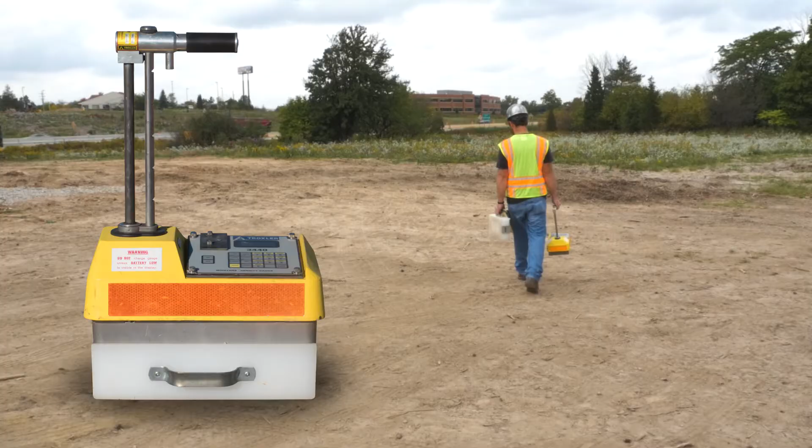The program you're about to see is for the density in-place testing using a nuclear gauge. MDOT currently has around 80 nuclear gauges, most of which are the Troxler model 3440. We won't cover radiation safety in this video, but we still need to be aware of the radioactive material that

we are dealing with. The first question: what does ALARA stand for? The answer: as low as reasonably achievable. Next question: what are the 3 ways we can practice ALARA? The answer: time, distance, and shielding.

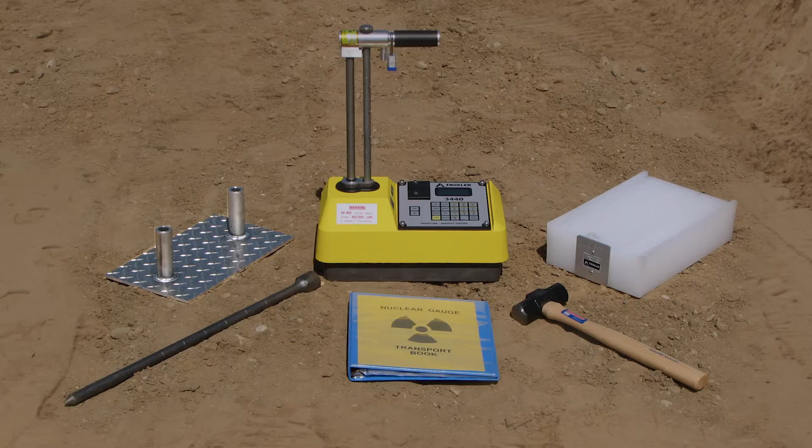This is the equipment necessary to run in-place density with the nuclear gauge: the standard block, a hammer, the gauge book, driving rod, and template. The standard block and gauge book are unique to each gauge and are not interchangeable from gauge to gauge. MDOT uses its own series of serial numbers to identify each gauge.

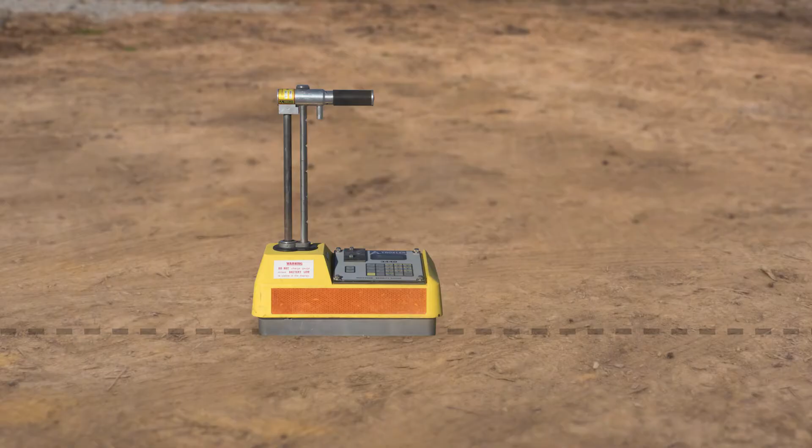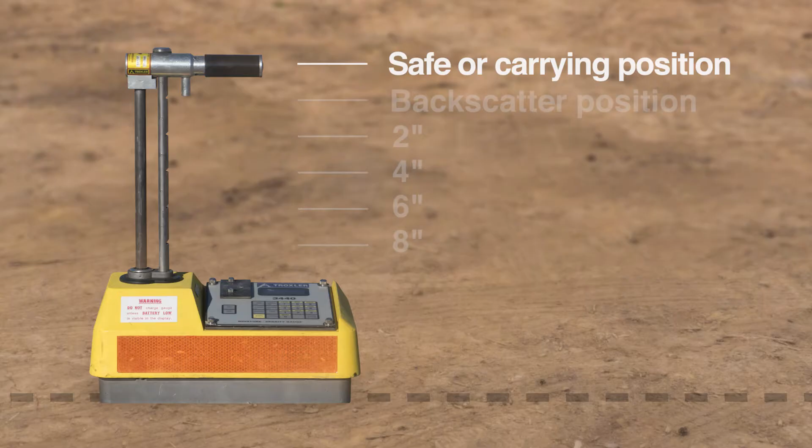The Troxler 3440 is known as a direct transmission gauge, and this graphic shows the various positions the source rod may be put. The top position is the safe or carrying position, and is also the position the daily operating standards are run. The next position, in the first notch down, is called the backscatter position. Normally, the only time you would use this position is when you are checking the density of HMA overlays.

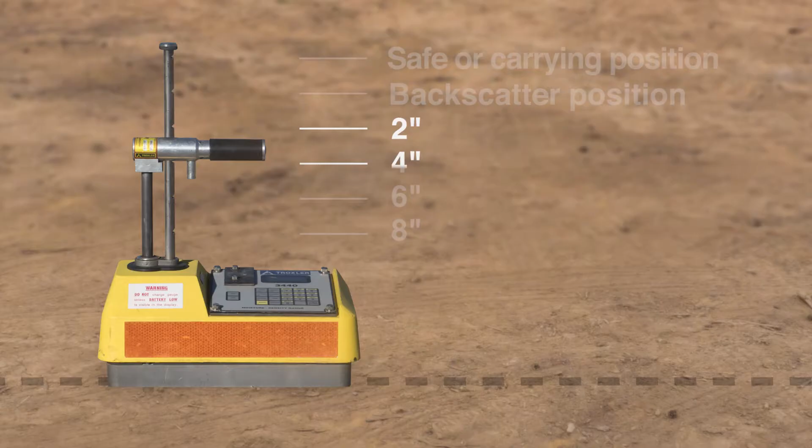The next 4 positions, 2-inch, 4-inch, 6-inch, and 8-inch, are also called the direct transmission positions. These positions are the depth the source rod is put into the material that you are checking for density and moisture.

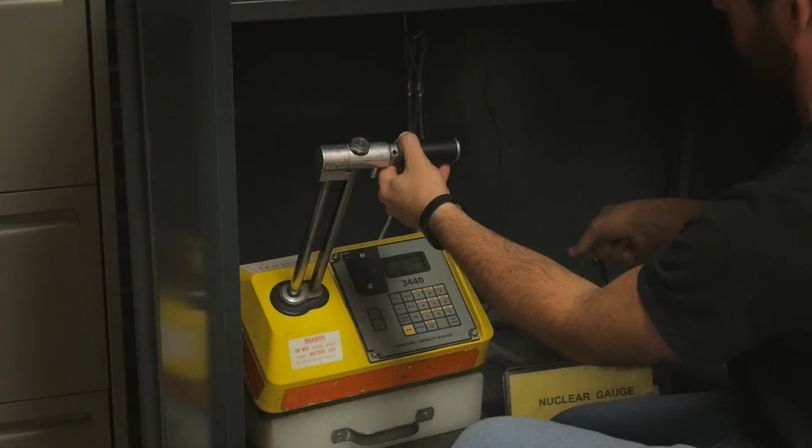On top of the cabinet is the sign-out book for the gauges. Whenever the gauge is removed from the cabinet, it must be signed out by the individual with the date, their name, the gauge number, location of where the gauge is going, the time it's signed out, and the time when it's returned. The gauge requires a warm-up period of 20 to 30 minutes before using. Once you turn the gauge on, you won't turn it off until you are through running tests for that day.

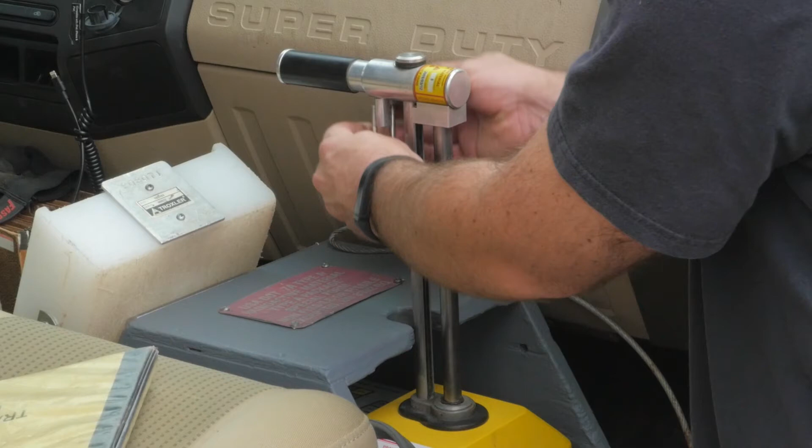MDOT always carries the gauge in the padded transport box on the passenger side of the pickup cab. Notice the standard block is also carried in the cab. The gauge is always padlocked with the cable during transport and on the job. The only time the gauge isn't locked is when you are taking a test or carrying the gauge to and from the truck.

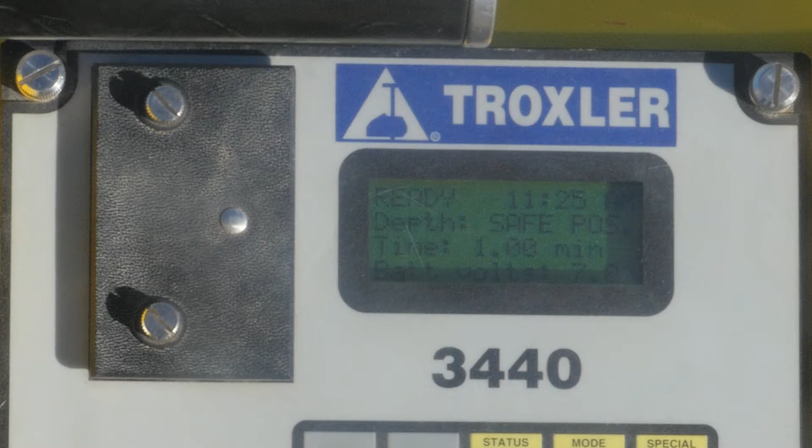This is the scaler at the ready screen. The top line says ready and flashes between time and date. The second line says depth, safe position, which indicates what position the source rod is in. The third line says time, 1 minute, which indicates how long the test will be. All MDOT tests are run in the 1-minute setting.

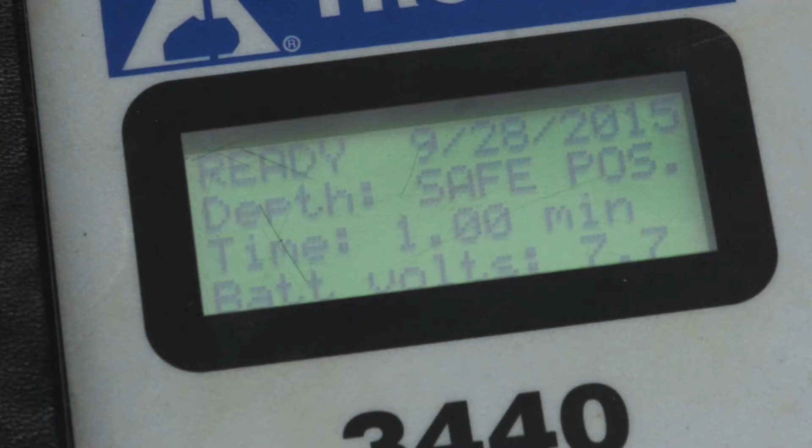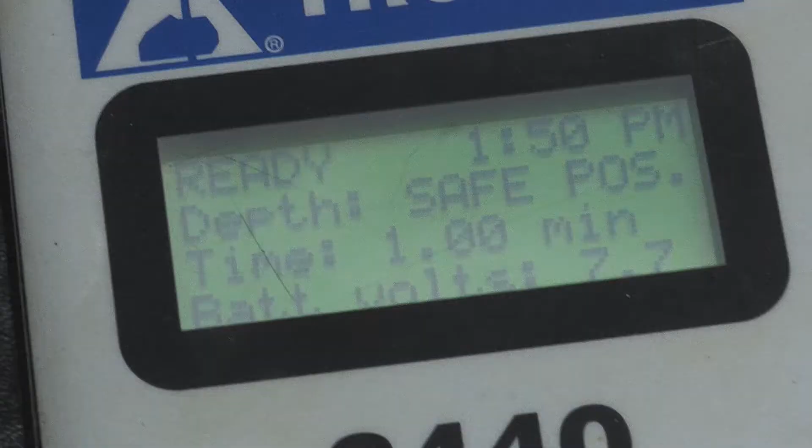The last line says battery volts. A full charge would read 8.0. When the reading is down to 7.0, it will start to flash batteries low. We'll cover more on what to do when this happens later in the program.

When you reach the job site, the standard block should be placed on sound earth, which is anything except topsoil, and it must be at least 10 feet away from any large object, like a pickup, or a construction vehicle, or equipment, or a bridge abutment. And it must be away from water, such as a mud puddle or a stream.

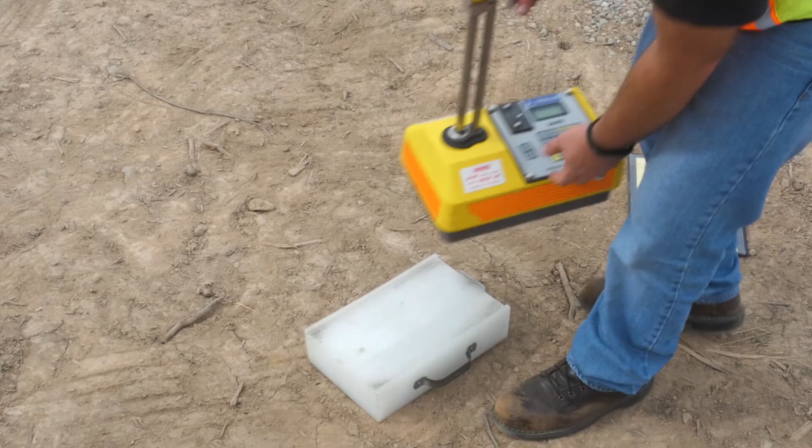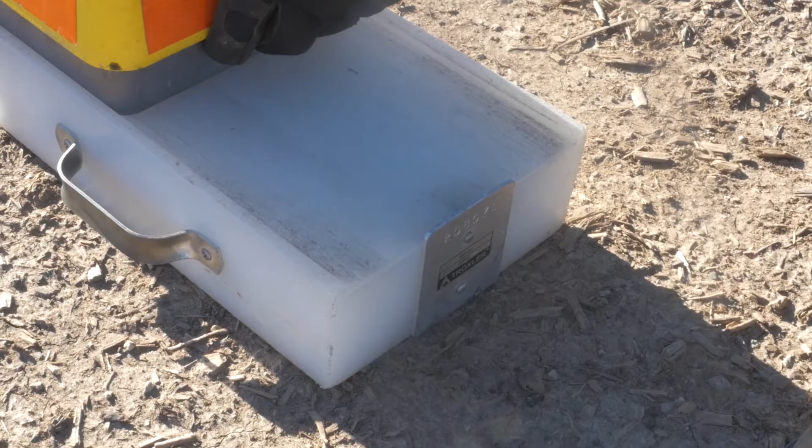Place the gauge on the standard block with the scaler end of the gauge towards the end of the standard block that has the metal end plate. It's good practice to slide the gauge to make sure it's between the raised edges. Pull the gauge toward you so it is tight against the metal plate. And tap the handle to make sure the source rod is secure in the safe position. Also, make sure the padlock is off the handle.

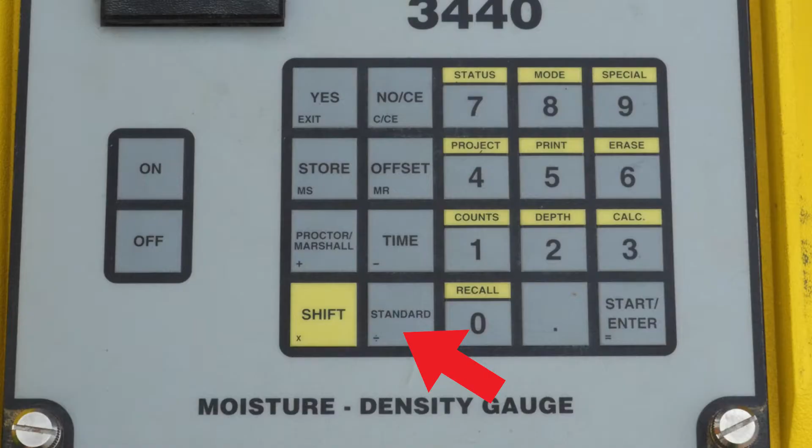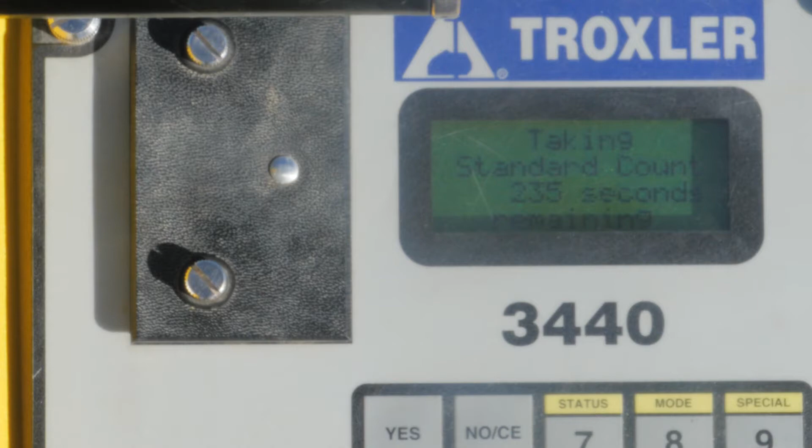Push the standard button located on the bottom row of buttons next to the yellow shift button. The gauge display will say standard count and will give the last saved standard count and ask, take new count? Press the yes button. The display will ask, is gauge on standard block and source rod in safe position? Press the yes button again. The gauge will start a 240-second countdown.

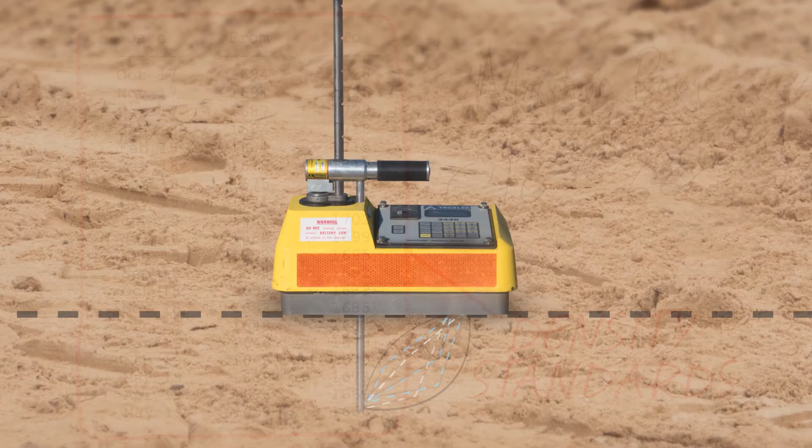Because of the decay of radioactive materials, known as nuclear half-life, the moisture standard range decreases each year as the nuclear gauge is annually recalibrated. The density standards will also change for this very reason. The radioactive material measuring density has a shorter half-life, so our density standards decrease more rapidly. Therefore, our acceptable range changes from month to month.

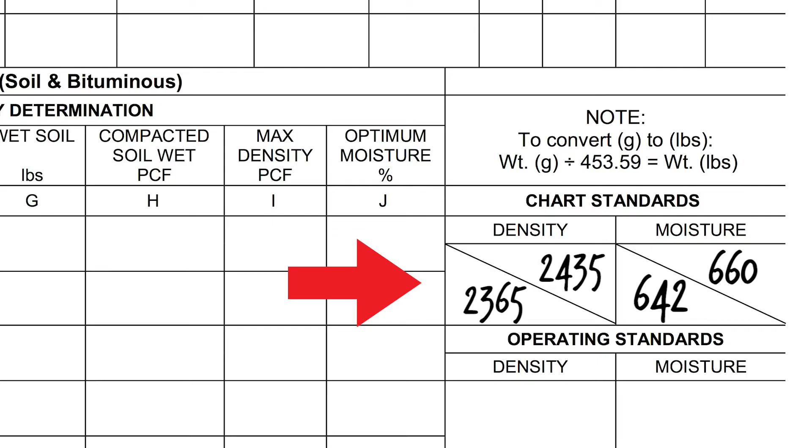Find the current month you are in on the left side of the sheet and follow it across to the right for the lower and upper limits of the density standard count. In the lower right corner of Form 0582B, record the upper and lower standards for density and moisture in the space provided under Chart Standards.

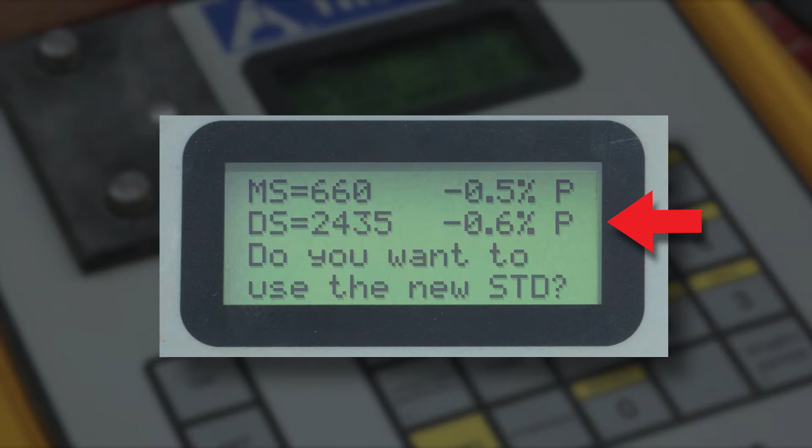This slide shows the gauge after it's done running the standards and what the scaler display looks like. For this example, MS equals 660 is the moisture standard, and DS equals 2435 is the density standard. To the right of the readings, the negative 0.5% and the negative 0.6% is referring to the average of the last 4 standards that were saved in the gauge.

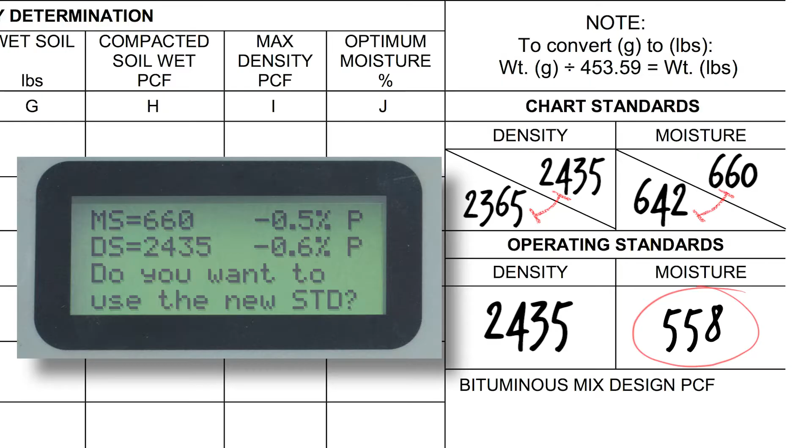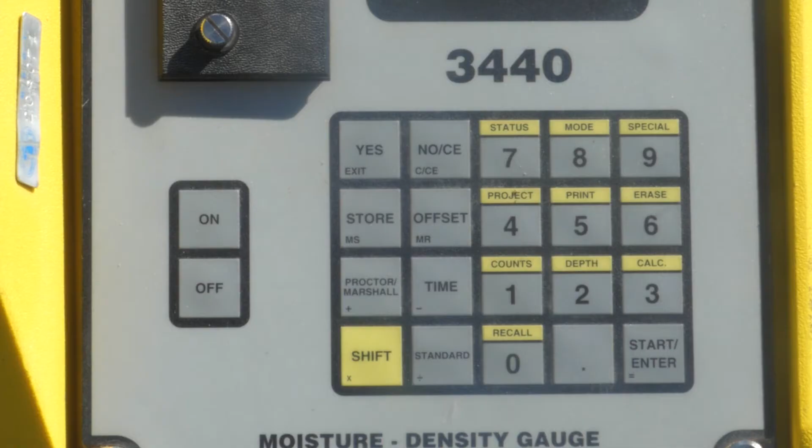If the two operating standards fall between the chart standards, record them under Operating Standards on Form 0582. If one or both of the values is not within the chart standards, run another standard. Try wiping off the standard block or moving to another area. If the problem persists, call an authorized person to come and look at the gauge. Make sure you press the Yes button if the standards are within the limits, and No if one or both are out of the limits.

You are now finished running the operating standards, so return the standard block to the cab of the pickup. It's very important to handle the standard block with care. Damaging the surface of the block can result in the gauge standards not coming within range, and possibly result in the gauge needing to be recalibrated.

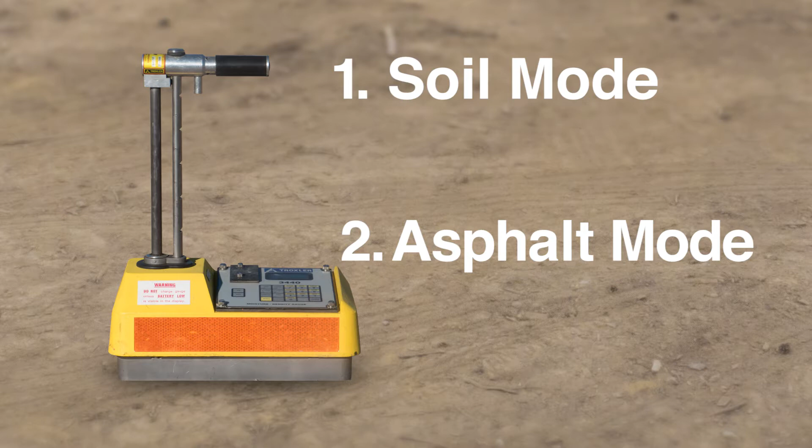Before you begin testing, you need to make sure that your gauge is in the correct mode. The Troxler 3440 model offers 2 different modes of testing, soil mode and asphalt mode. The soil mode is used for granular and cohesive materials. The asphalt mode is used for recycled materials and HMA surfaces.

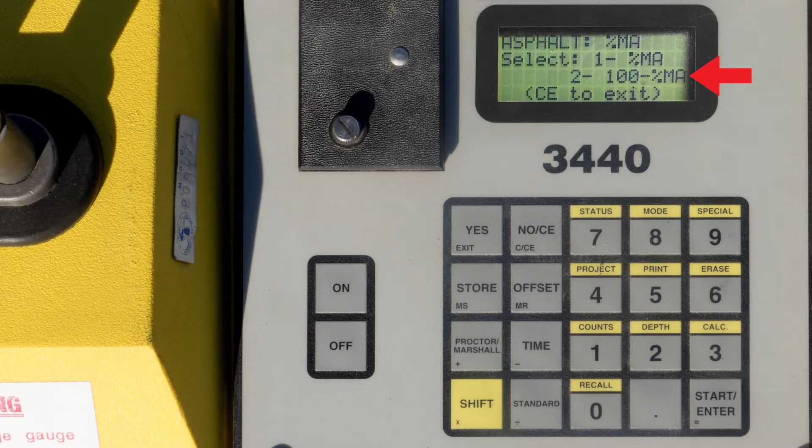We are now ready to take our in-place density test. What you want to do is use visual inspection to determine where you take your test. We usually try to take our test in areas that appear to have the least compaction. The in-place density test is a spot check, so if tests in these areas pass, we can assume the areas that appear more compact would also pass.

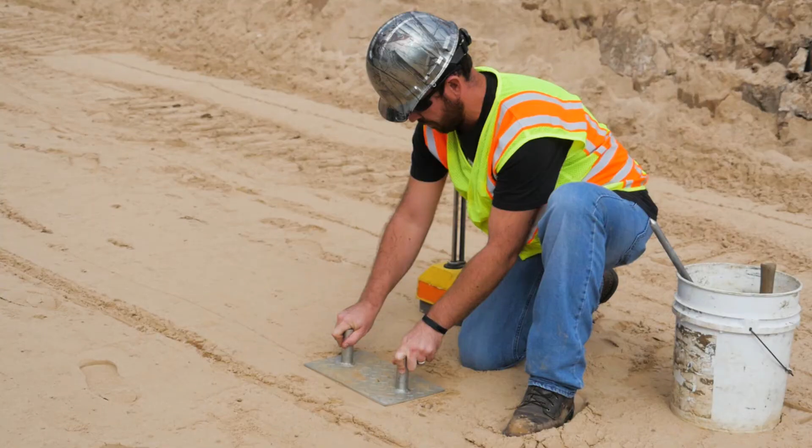After visual inspection, we use the template to prepare the actual test site. The site does not have to be level, but it should be flat with few surface voids. Use the hammer to drive the drill rod to the depth at which you are going to take your test. Keep your foot on the template while driving the drill rod.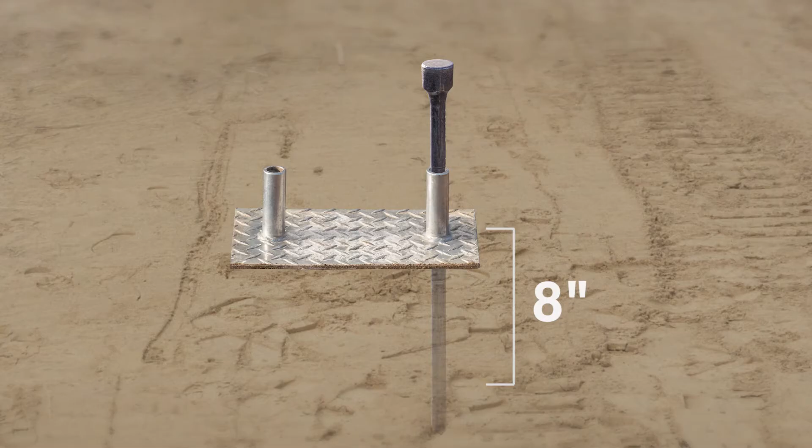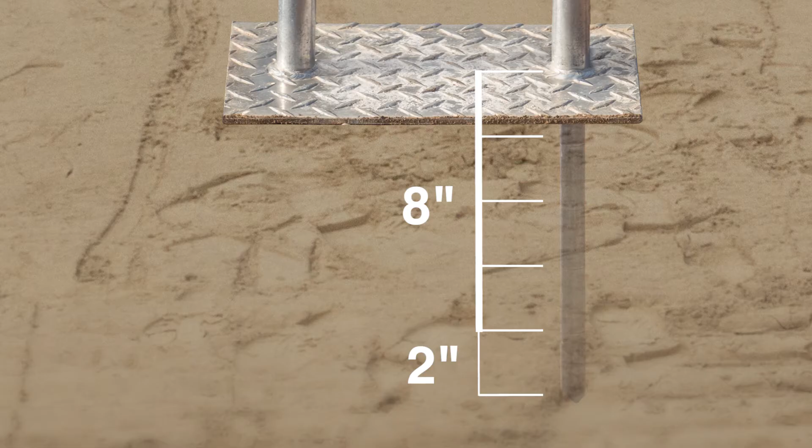This graphic shows the template and drill rod driven to the 8-inch depth. Notice that when the 8-inch groove in the drill rod is flush with the top of the handle on the template, you have actually driven the drill rod an extra 2 inches. This gives some space for any disturbed material to fall into the hole when inserting the source rod.

Keep your foot on the template. Twist and remove the drill rod. If the drill rod is difficult to pull out, use a T-handle. Never wiggle or push the rod side to side when removing it. Keeping your foot on the template, use the tip of the drill rod to trace around 3 sides of the template. Remove the template and set the gauge within the scribed lines you made around the template.

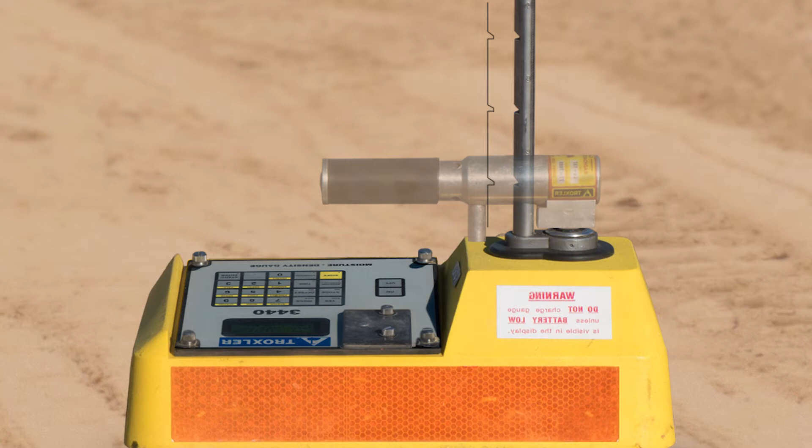Squeeze the trigger and push the source rod down into the hole to the depth at which you are going to take your test. Make sure the source rod trigger is seated firmly in the notch of the index rod. Use your hand and tap the left side of the gauge so it is flush and tight against the driven hole. Press the Start Enter button, located on the bottom right of the scaler, to begin the 1-minute test. Be sure to step back about 8 or 10 steps to avoid radiation exposure.

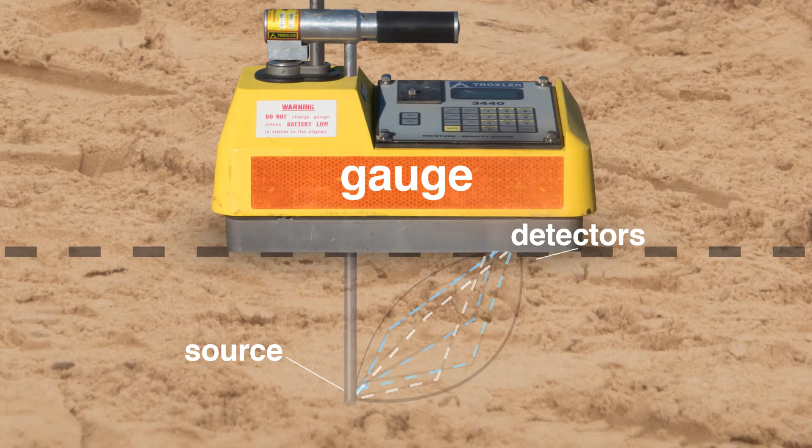This graphic shows the gauge in a direct transmission test. The gamma source at the end of the source rod is emitting gamma rays in all directions. We are concerned with the gamma rays that are emitted towards the detector tubes. The more dense the material, the lower the gauge will count the gamma rays. The less dense the material, the more gamma rays the gauge will count.

The neutron or moisture source is a fixed source, approximately in the middle of this gauge. This source also emits radiation in all directions. This source emits fast neutrons, and the gauge detects slow neutrons. The hydrogen in the moisture slows the fast neutrons down to a slow enough speed that the detector will count. The more moisture in the soil, the more hydrogen, resulting in more slow neutrons for the gauge to count. The higher the count, the more moisture that is present in the soil.

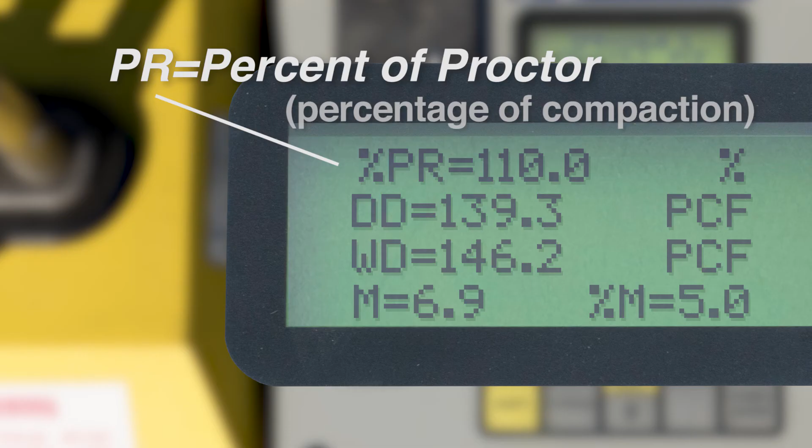When the 1-minute test is over, this is what the scaler display will show. %PR is the percent of Proctor, or percent of compaction. DD is dry density in pounds per cubic foot. WD is wet density in pounds per cubic foot. M is the weight of moisture in pounds per cubic foot. %M is the moisture percent.

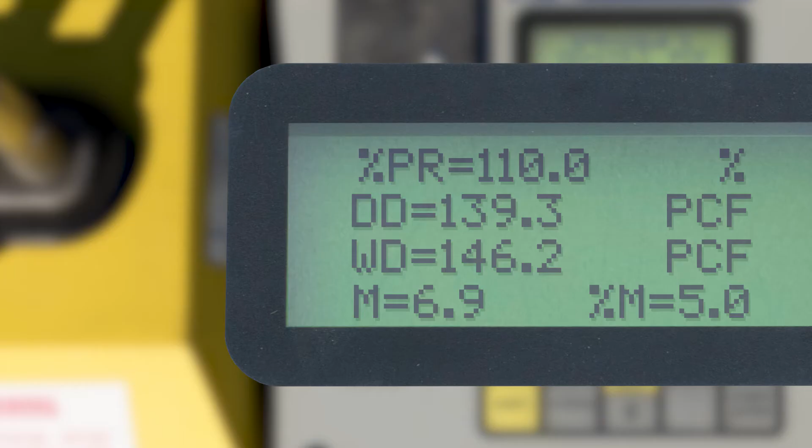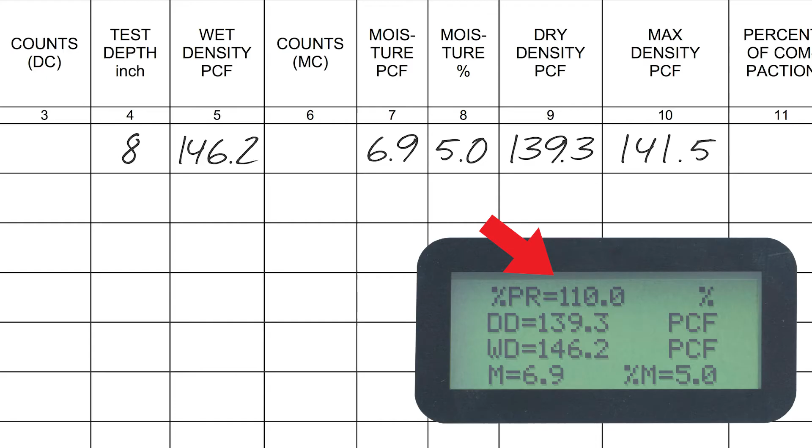In this example, these are the displayed values on the gauge, which will be recorded onto Form 0582B. DD equals 139.3, column 9. WD equals 146.2, column 5. M equals 6.9, column 7. And %M equals 5.0, column 8. We do not record %PR yet because we need to establish our maximum density first.

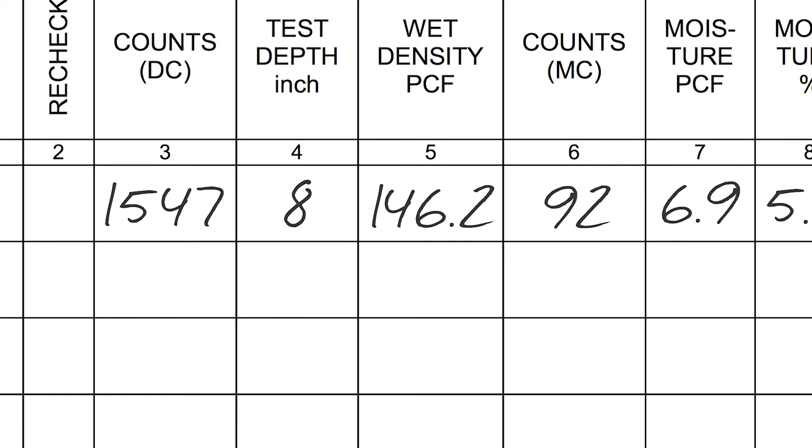To get moisture and density counts, press the Shift button, then press the Count button, button 1 on the scaler. Counts is labeled in yellow on the scaler, so we have to press Shift before we press Counts. The display on the scaler shows the density count and moisture count. Record the density count of 1547 in column 3, counts DC. And record the moisture count of 92 under column 6, counts MC, or moisture count.

Obtain a sample of soil to establish the maximum density from the same site where you ran your in-place test. Procedures for each maximum density test will be covered in other programs. After you have established your maximum density below, record the value above as well in column 10, max density. Then we enter the same value in our gauge by pressing the Proctor-Marshall button located above the yellow Shift button.

The display will ask, "Want to change?" Press the Yes button. The display will show a menu. To change the soil MD, press the 2 button. The display will ask, 1 stored value or 2 new value. Press 2, new value. Enter the maximum density value numerically. In this example, 141.5. The display now shows the complete max density, as instructed by the display. Push the Start Enter button.

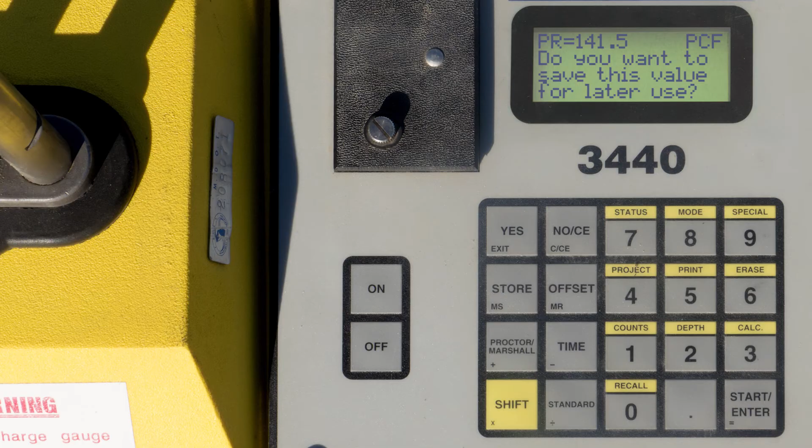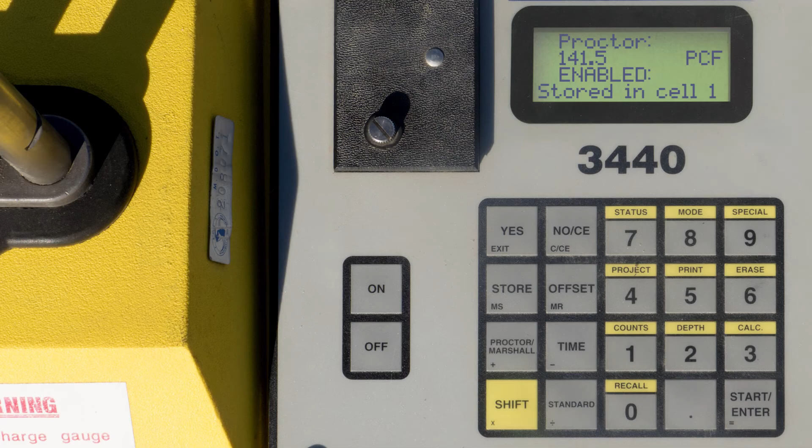The display shows the max density, 141.5, and asks, "Do you want to save this value for later use?" Press the Yes button. The display requests you to pick a memory cell to save the max density in. The inspector chooses cell number 1. You may choose either 1 through 4. The display shows max density value 141.5, enabled, and stored in cell number 1. The gauge will return to the Ready screen.

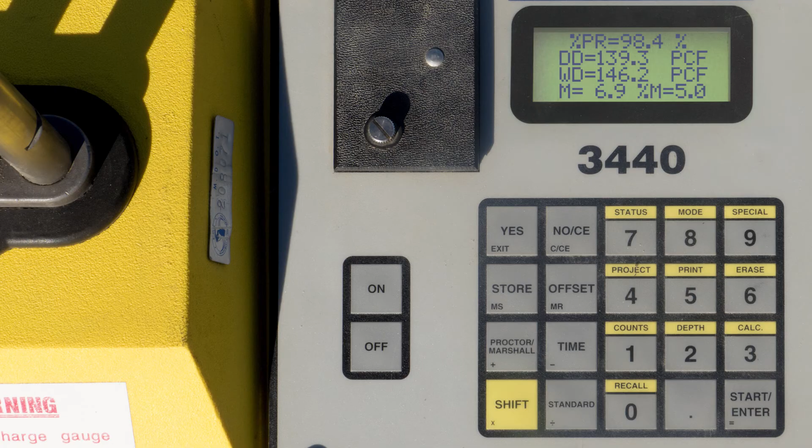In order to get the percentage of compaction, first press the Shift button. Then press the Recall button, button 0 on the keypad. This will bring up the last test you just took and show the correct percent of compaction at the top of the display. The gauge divides the dry density of the in-place test by the max density you established and programmed into the gauge, and displays the results. Record the %PR value, which in our example is 98.4, in column 11, percent of compaction.

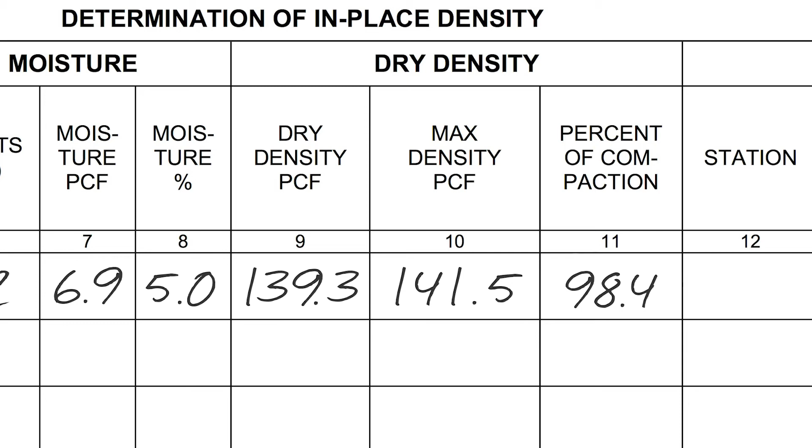The test is not complete until you record the stationing, distance left or right of center line, depth below plan grade, and the item of work. Check the back of Form 0582B for the requirements of the material to pass. In this example, S stands for sub-base that requires 95%. This would be a passing test.

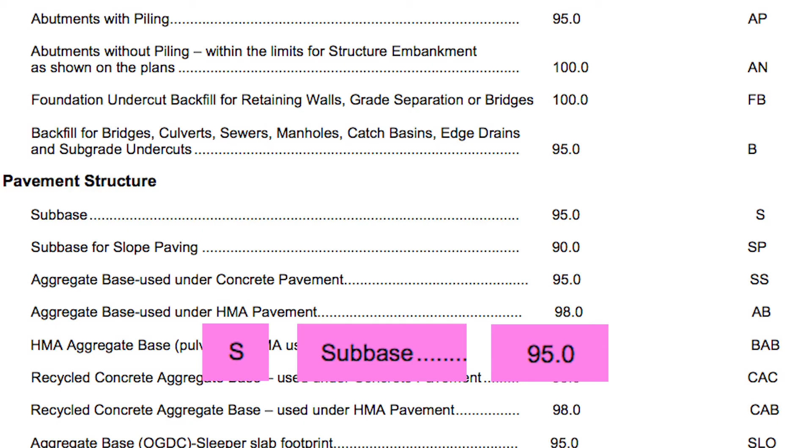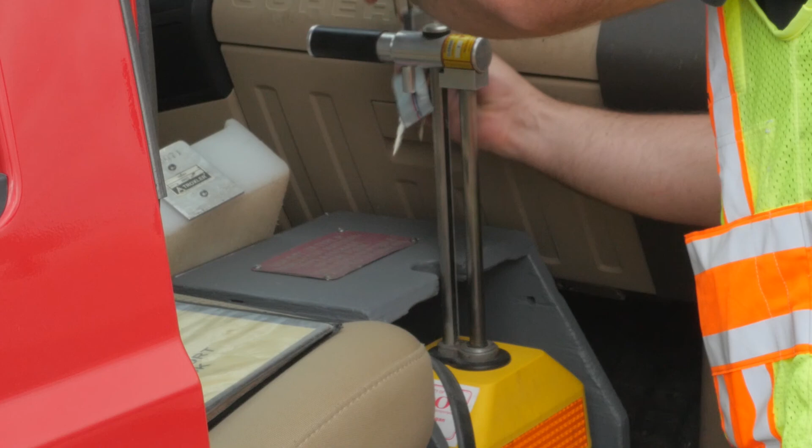After completing the test, return the gauge to its padded box in the pickup cab and lock with the proper restraints. Never leave the gauge sitting on the grade or on the pickup tailgate unattended. It needs to be emphasized that the padlock should always be on the gauge and locked when transporting the gauge anywhere. The lock should also be in place with the cable restraint when the gauge is stored in the cabinet at your office. When going to lunch or leaving the pickup for any reason, the cab of the pickup should also be locked when the gauge is in it.

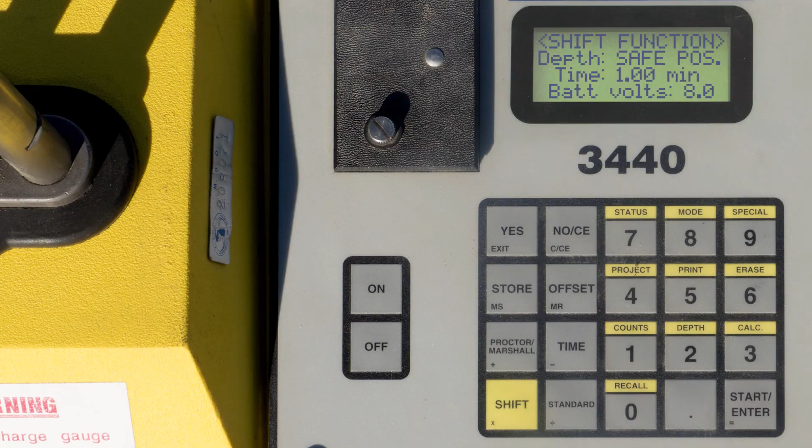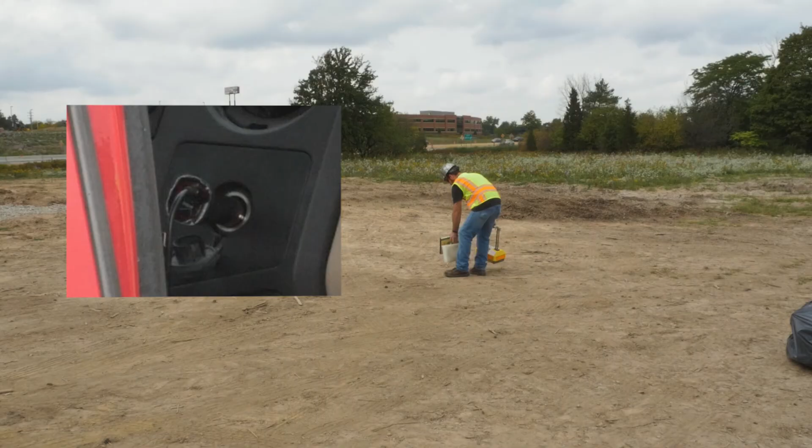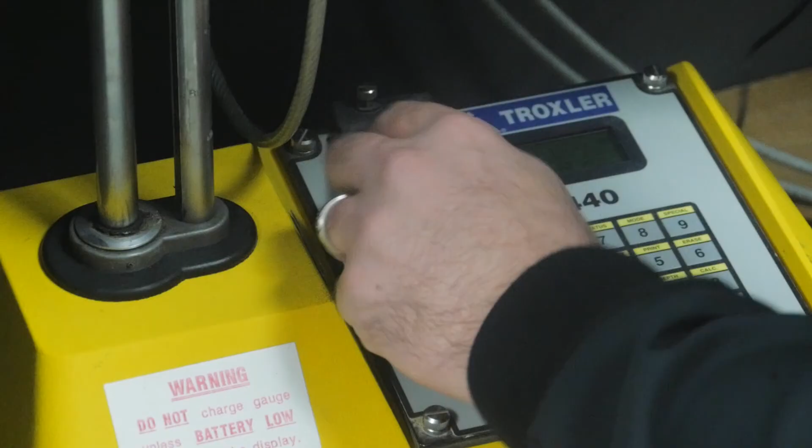When using the gauge and battery low appears on the bottom of the display, the gauge batteries need recharging. If you are in the field testing, a 30-minute recharge with the DC outlet charger of your vehicle will provide several hours of use. The gauge requires 12 to 16 hours of recharging to fully charge the battery packs. When recharging the gauge, connect the charge cord to the gauge by unscrewing the black access cover. Make sure the gauge says "Batteries charging" after it's plugged in.